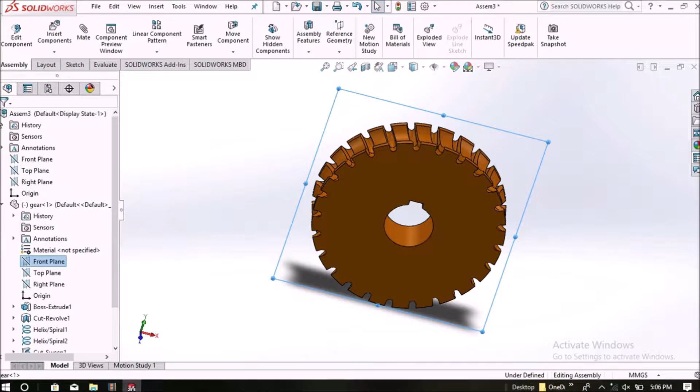So now first I will select gear. We will keep it floating. Just select the front plane of the gear and the front plane of the assembly and mate them.

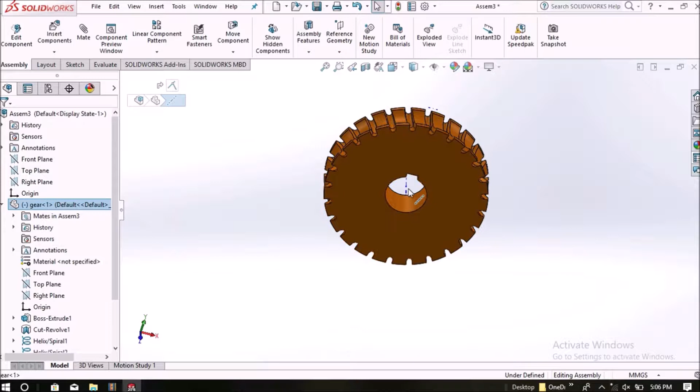Now make the axis visible, and mate the axis of the gear with the right plane, and also with the top plane.

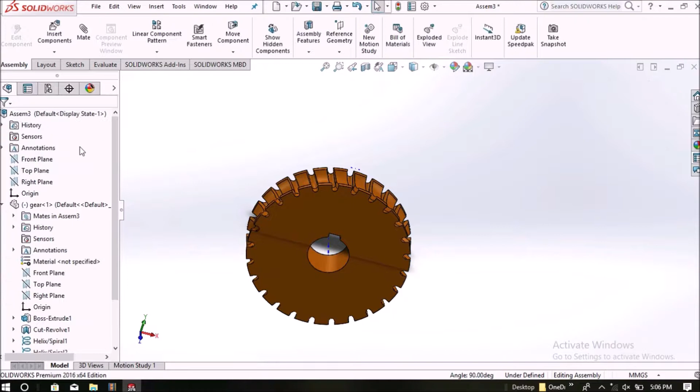Now I will insert a worm here.

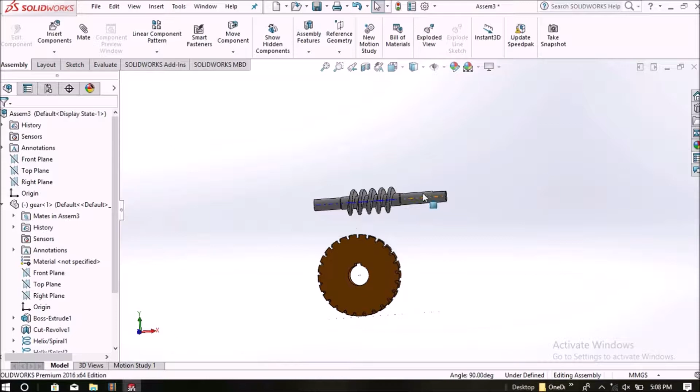Now select the axis of the worm and mate it with the front plane, and mate them.

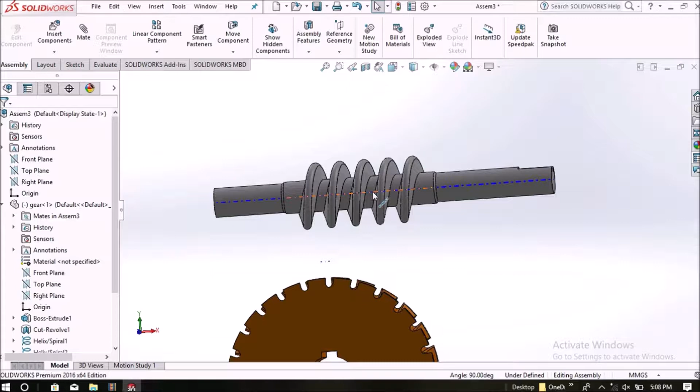Now the distance between these two axes, so it will be 125.

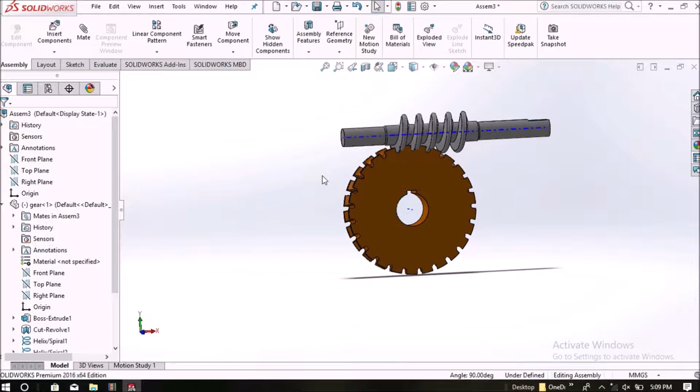Now inside the worm we will select the right plane and the right plane of the assembly and we will mate them.

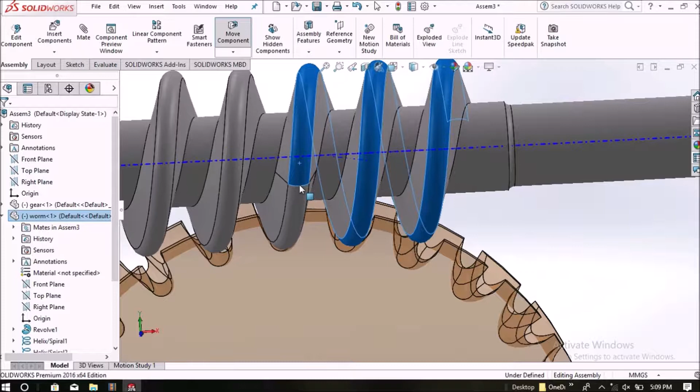Okay, so now the teeth are perfectly fitting.

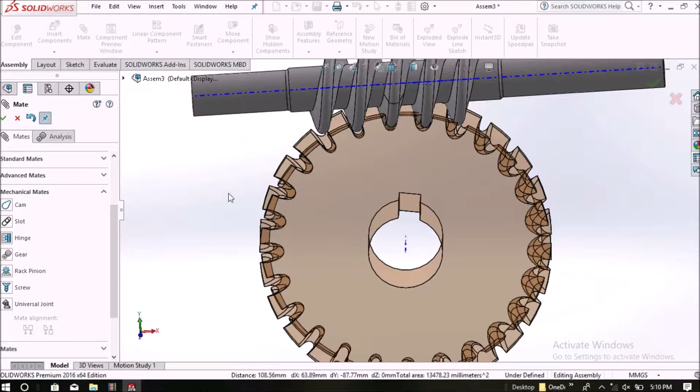So click on this outside diameter of the worm and inside of the gear, click mate, and go to mechanical mates over here and select gear. So the ratio will be 1:25 mm, where mm is actually the diameter of worm and worm wheel, so it is actually the gear ratio. Once you specify the gear ratio, okay, now as you can see...

So it's easy to understand the movement. For each revolution of the worm, the worm wheel will rotate 1/25 of the times.

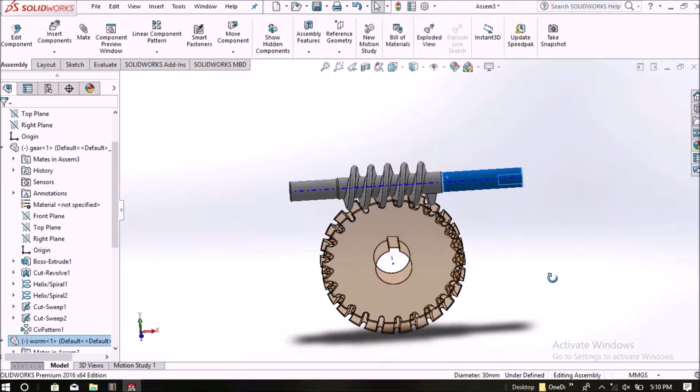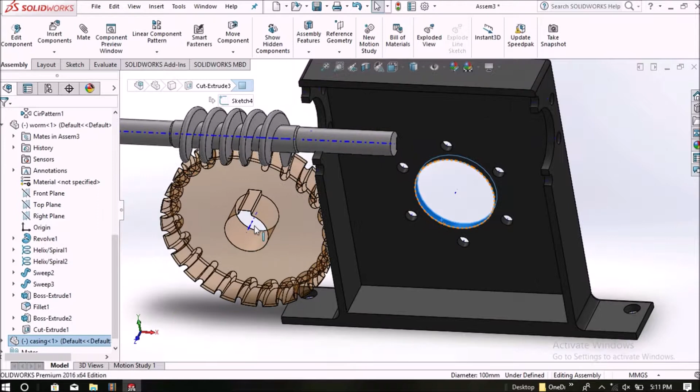Now let's insert casing over here. First I will make it concentric with the gear.

Let's change the transparency of the gear.

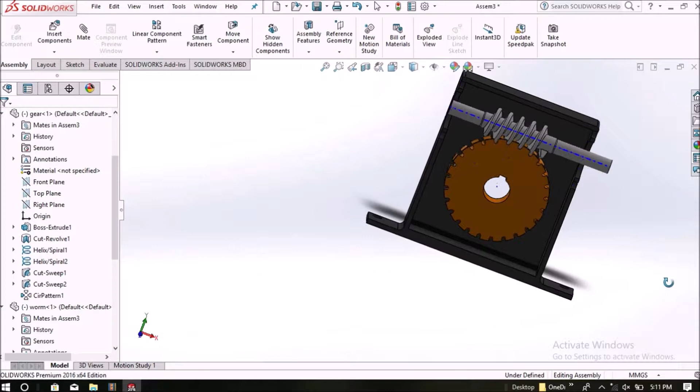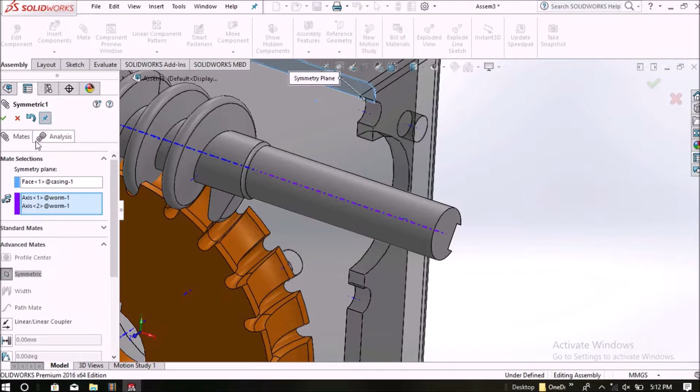Select this axis of the worm and this plane. I will select this axis and just mate them.

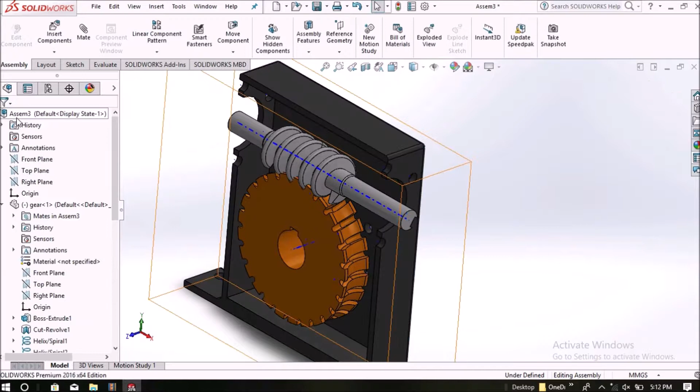Now I will just make this top plane parallel to the top plane of the assembly. So let them be parallel, and make these planes parallel.

Now let's bring another casing, that is casing 2.

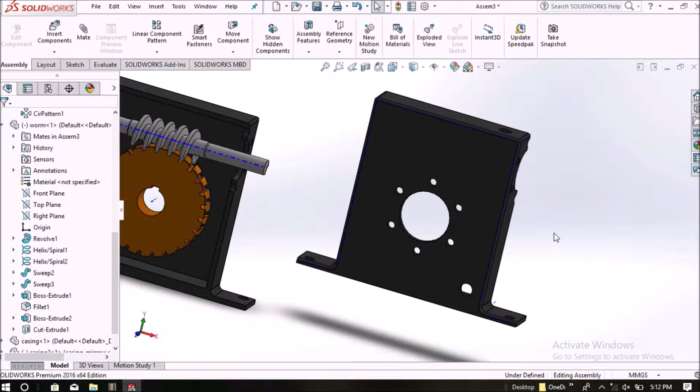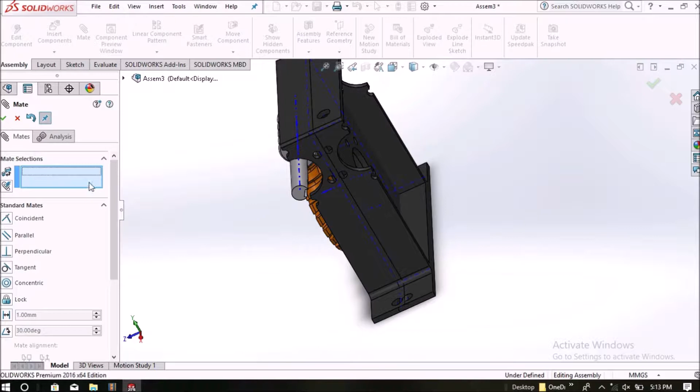Again let's make them concentric. We want to mate both of these planes, and also the top planes of both the casings.

Select mate, and now select this plane and the opposite plane here, and mate them.

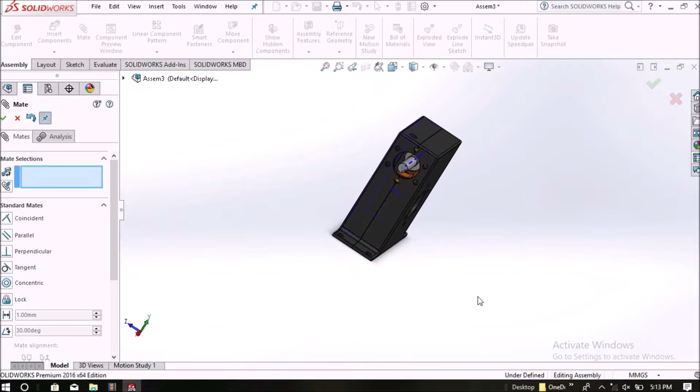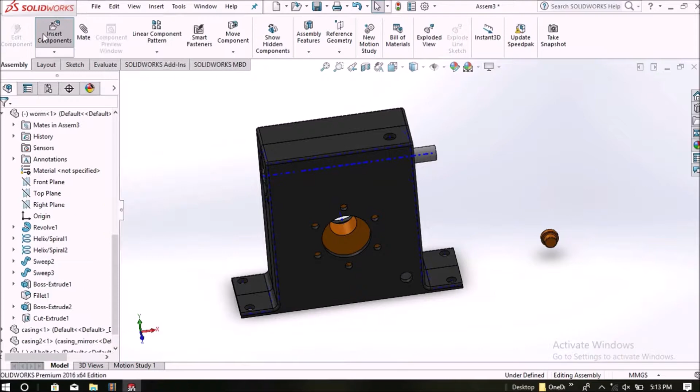Let's put the oil bolts here and here. So we just insert 2 oil bolts.

Now this plane, it will be parallel to this one. Just mate them.

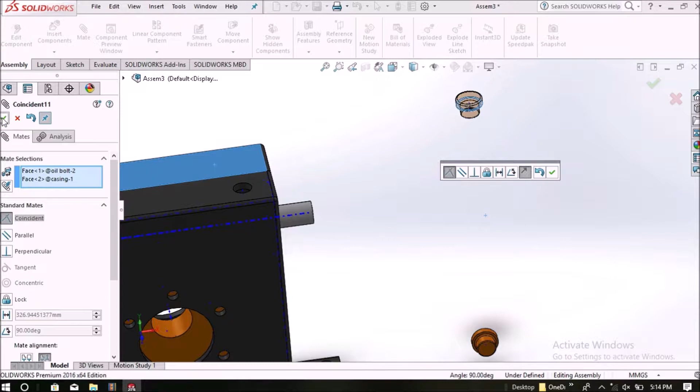We will mate this with this circle. Do the same for this oil bolt. Now in this case, if both are facing in same direction, just change the mate alignment.

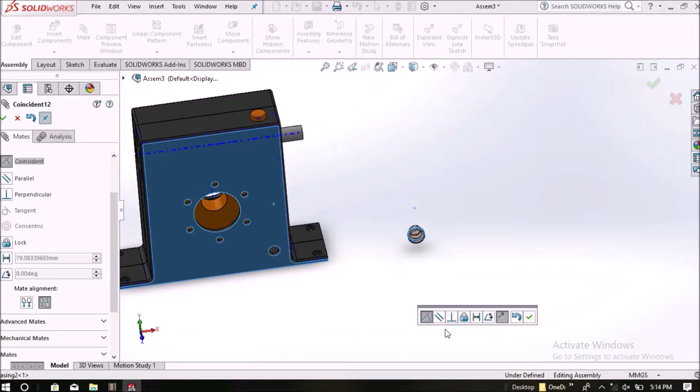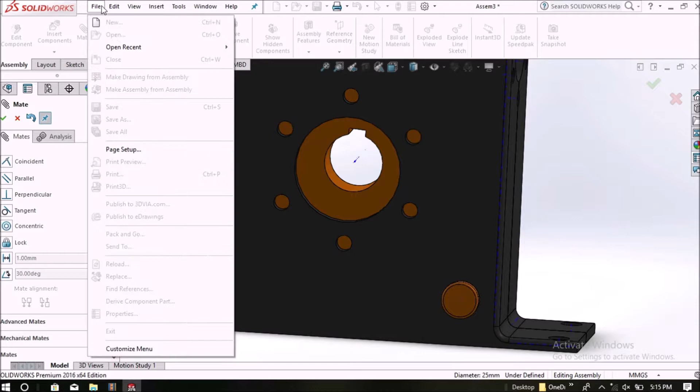Now let's insert the shaft between this gear. So I will just click insert. Select the gear shaft.

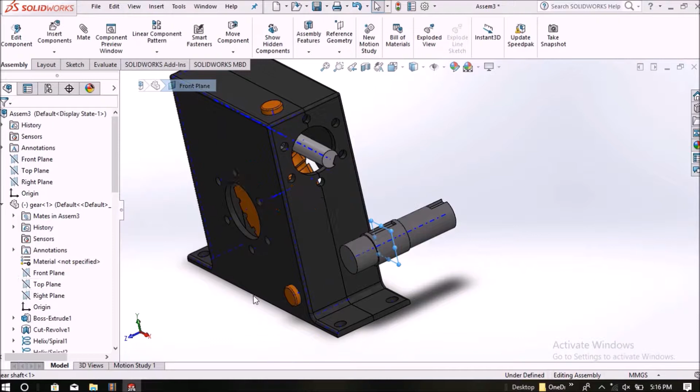Okay, so I want this key facing towards us. So I will just go to the gear shaft, select its front plane, and make the front plane of the shaft mate with the front plane of the assembly, but I will change the alignment.

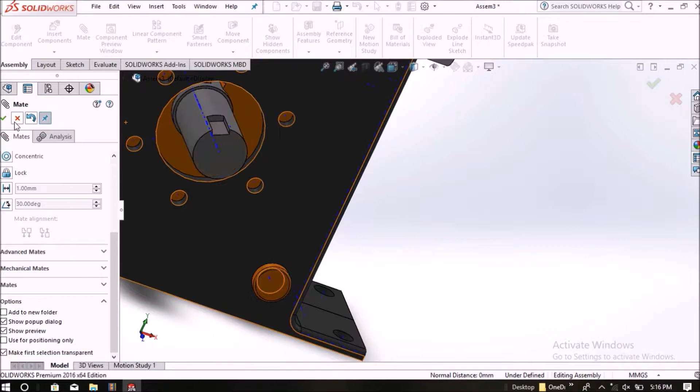Let's make both of these axes mate. I will just make this portion and this portion.

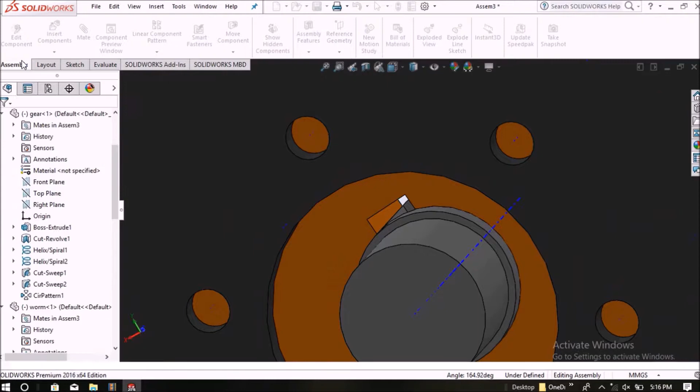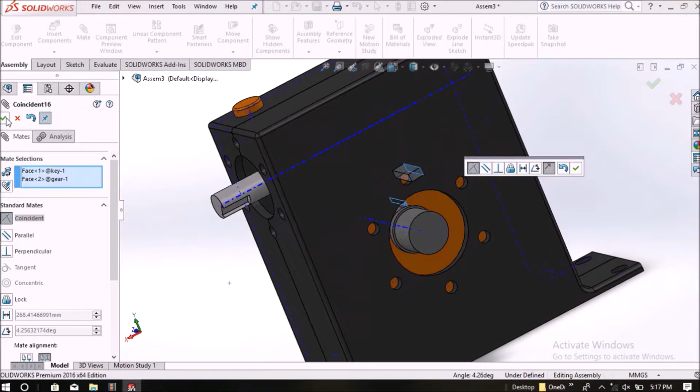Now let's insert a key between them. So I will be mating this, the bottom surfaces.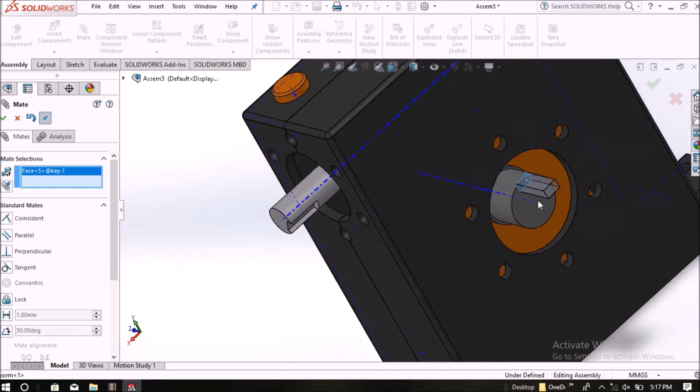Okay, now this surface here and the last surface. So our key is now fixed between the shaft and the hub.

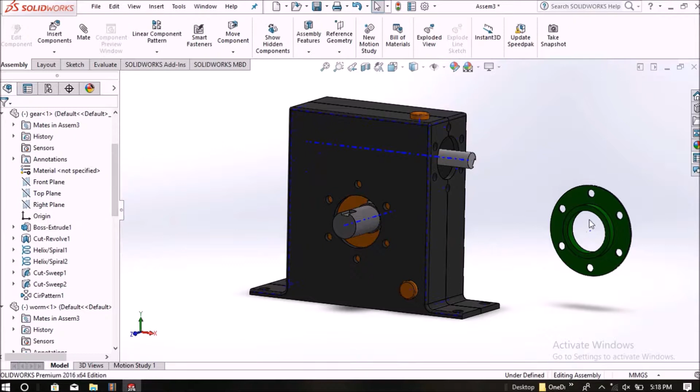Now let's insert these flanges over here. I can just copy paste the flange. I will also insert the flange for the worm.

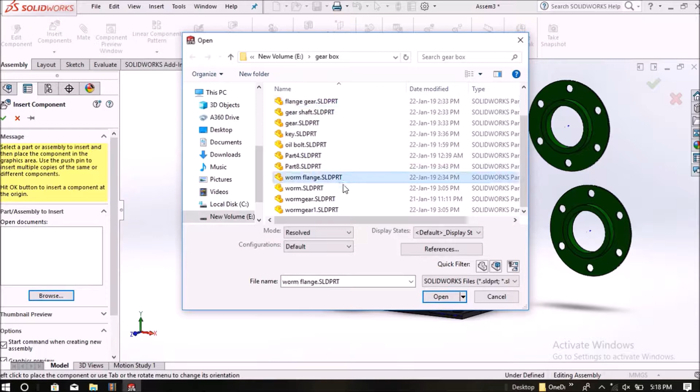And I will just copy paste. It's not allowing me to do so, so let's insert one more of that.

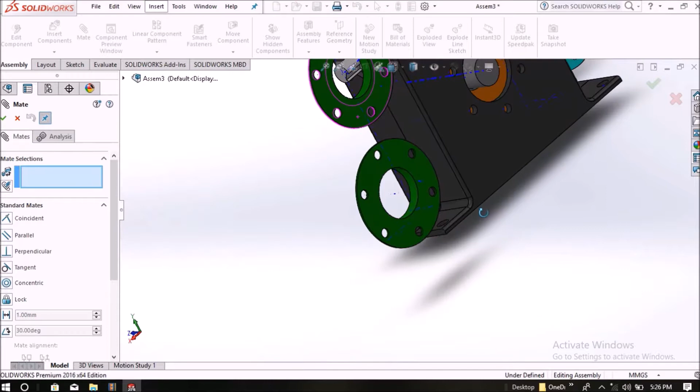Now let's connect the flanges. So I will just select these two surfaces. Let's change its alignment.

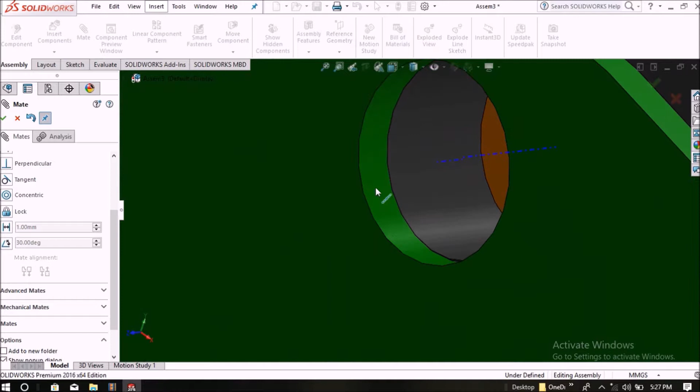Let's make them concentric, and now we should make these circles concentric.

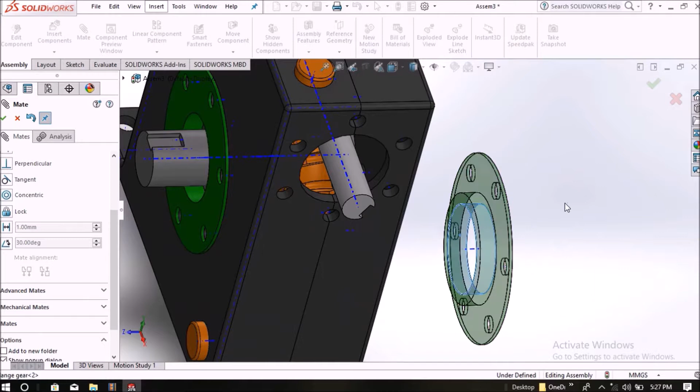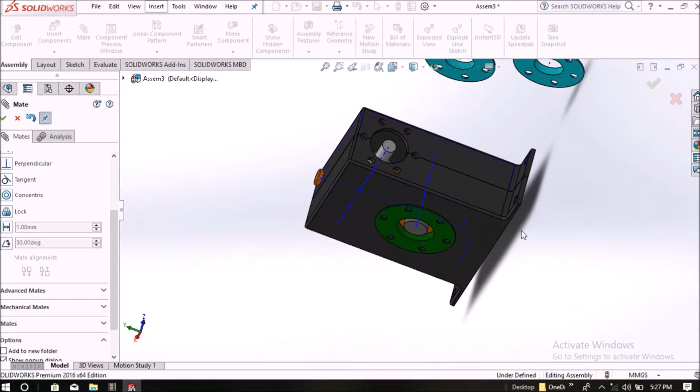So I will repeat the same for this flange, and also both of these flanges.

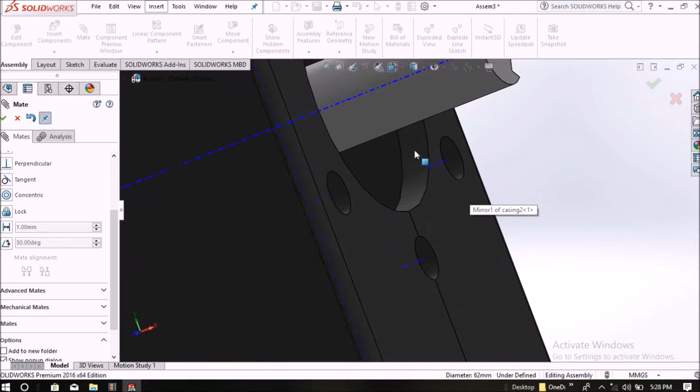Now let's insert bearings in this assembly. So now here go to the toolbox and you will select SKF bearings. Go to the bearings, select roller bearings.

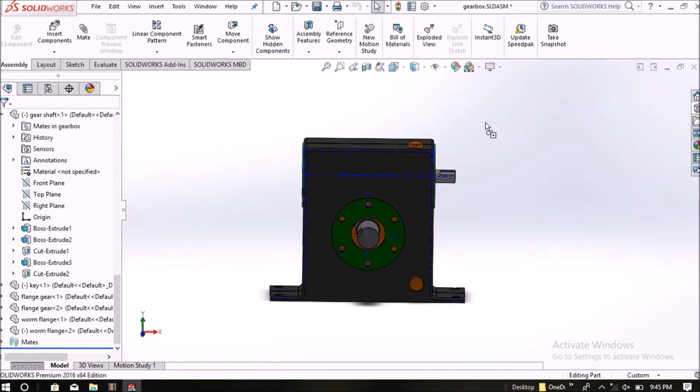Okay, first we will select ball bearings and radial ball bearing. So now there are many sizes over here, so I will just select 6010, that is our standard bearing which we have selected.

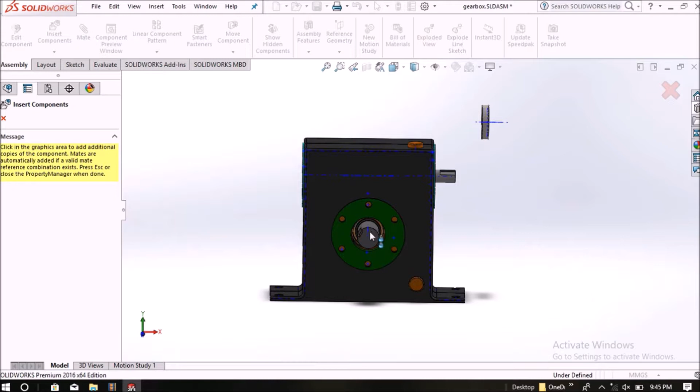Now we will just put two of them. Let's match the faces.

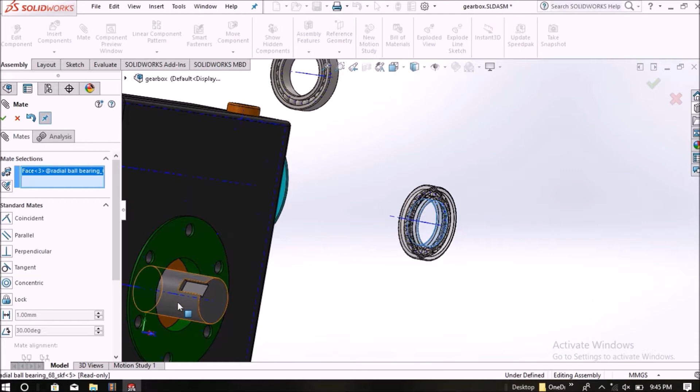And I'll make it concentric with the shaft. Now I select this bearing.

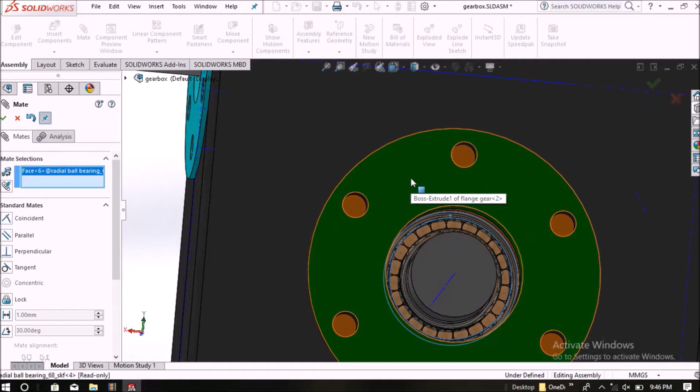Now let's select our roller bearing. So we designed a taper roller bearing, so I will just drag it here.

Now our design was 32206, so this is the bearing.

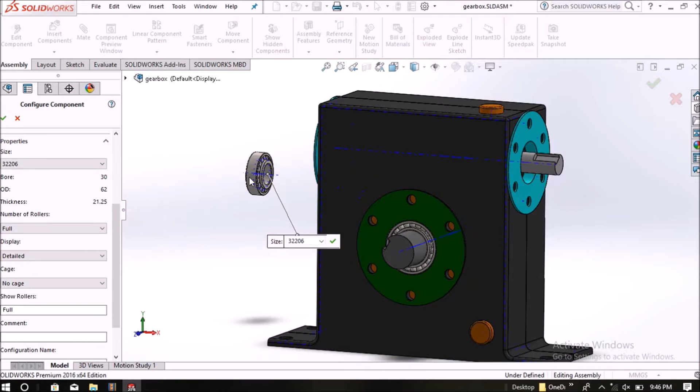So you can change the number of rollers from here, so I can make it full, which will increase the number of rollers. Let's keep it full. You can either make it simplified or keep it detailed. I will just click OK.

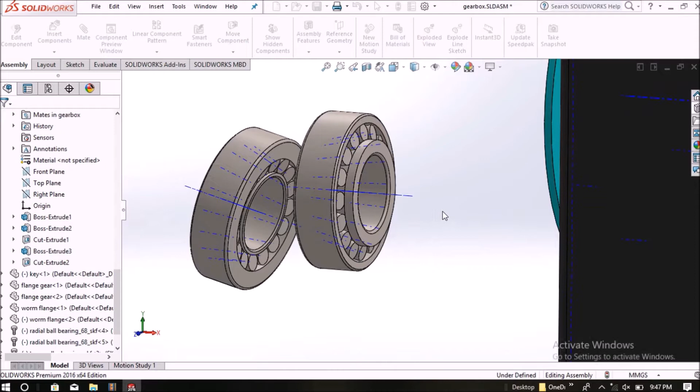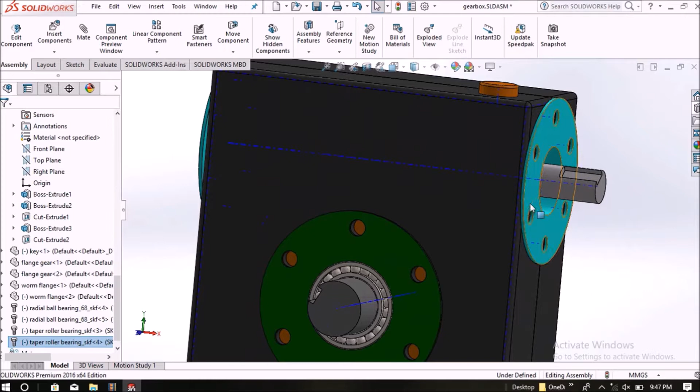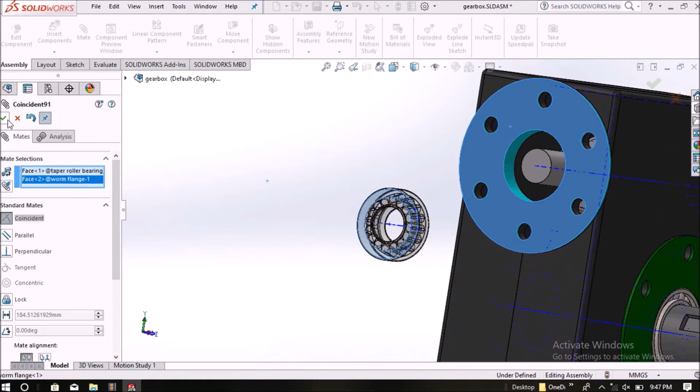So now we have here two bearings. Now let's get them into their positions. Okay, so now we have fixed our bearings.

Now let's insert bolts over here. We can choose from here, so we will go into bolts and screws in ISO. I will select this hex bolts and screws, and in that I will select this grade.

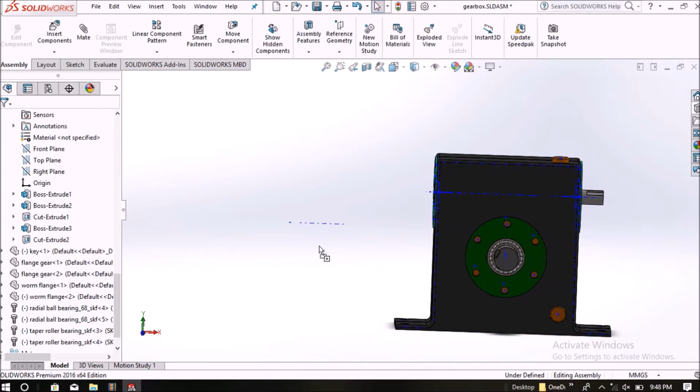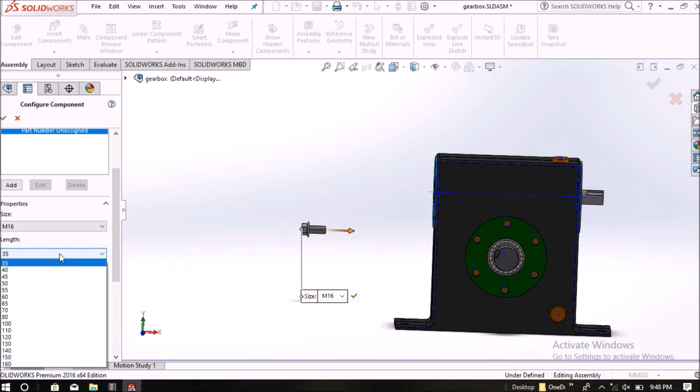Actually I will select this hex flange bolt. So we can select our sizes. I want here M16, let's keep its length as minimum.

So we can either make it schematic, cosmetic, or simplified. I will just keep it simplified, so it will consume less memory.

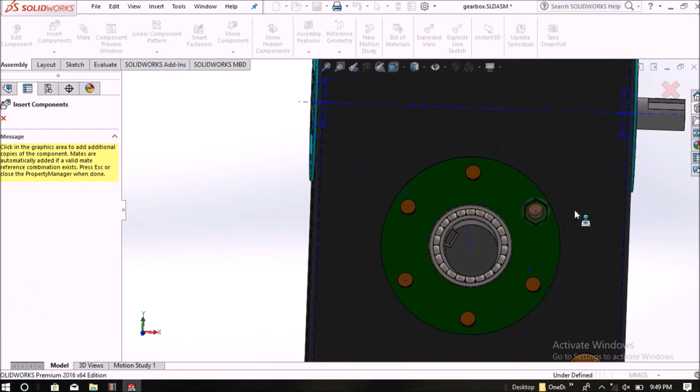Now you can just place the bolt directly on the holes. Just move your mouse over it, left click, and you can place your bolts directly on the flange. So now I will just fast forward it.

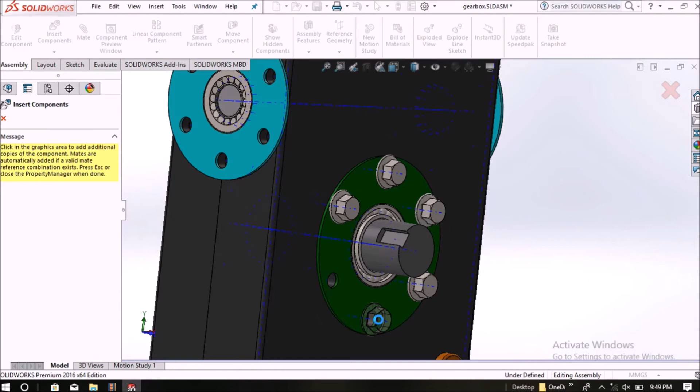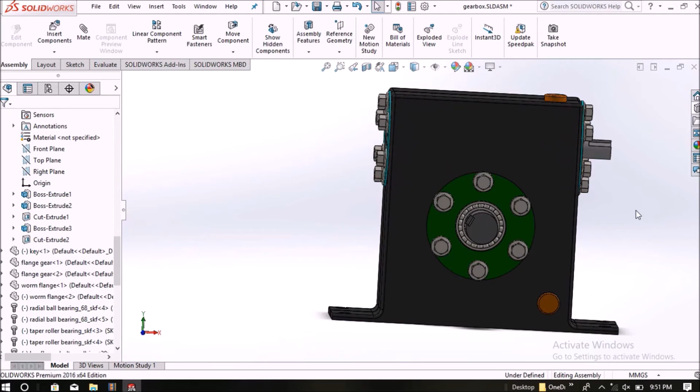Let's make this transparent so we can see the inner parts. So our mechanism is working properly.

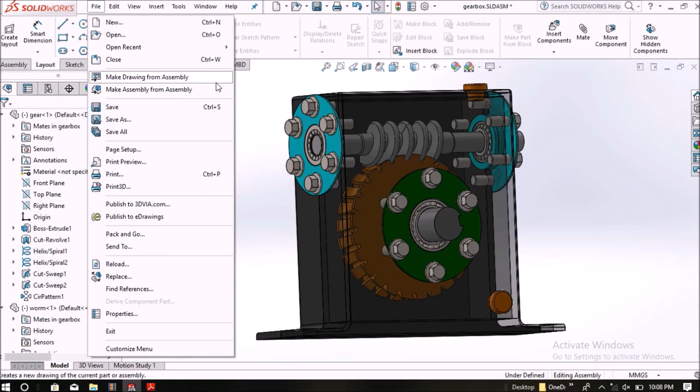Okay, now in the next step you have to draft it, that is to make its drawing. So we can just select here make drawing from assembly. I am not going to cover this in this video, but I will show you how this will look after drafting.

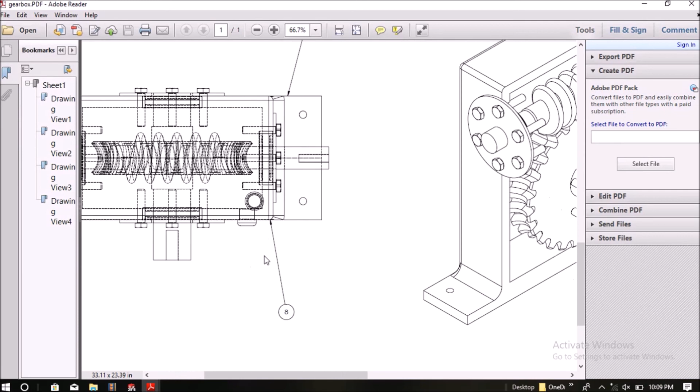So this is our gearbox front view, this is our side view, this is the top view, and this is our isometric view.

So we need to create a bill of material here, and also our college name and index. And I have also drafted the part sheet, so I have drafted all the parts over here.